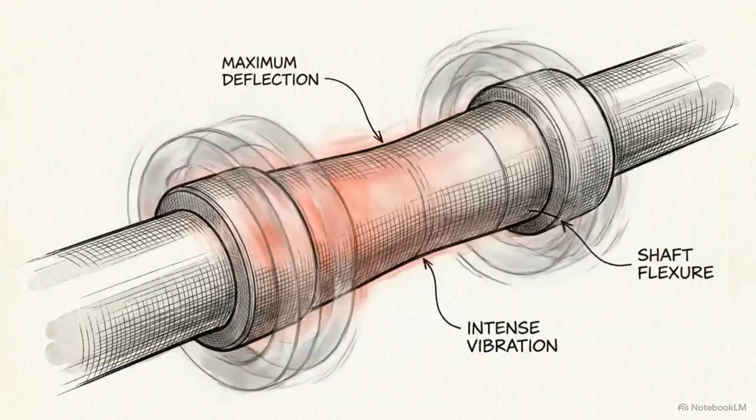Mechanical vibration is the continuous exchange of energy within a physical system. It is the physical process of kinetic energy converting into potential energy, and then back again, over and over.

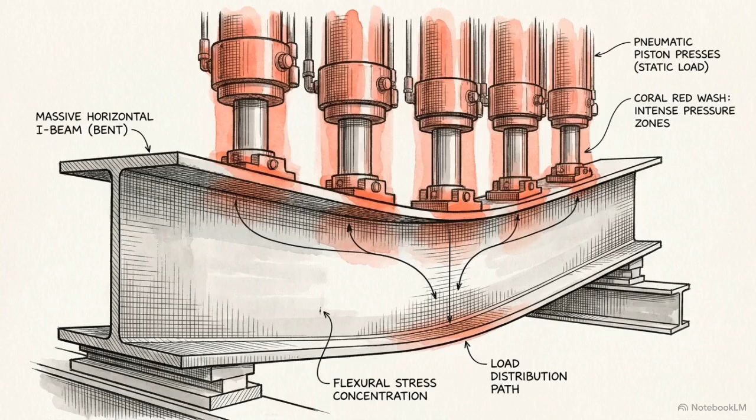When analyzing structural integrity, calculating static loads, how much dead weight a beam or a column can hold, is a necessary first step. But static calculations assume a perfectly still environment, and they fail to account for cyclical, repeating forces. Cyclical dynamic loads inflict microscopic damage. Repeated rhythmic flexing exploits tiny imperfections in a material, causing microscopic fissures to rapidly expand and spiderweb until the part

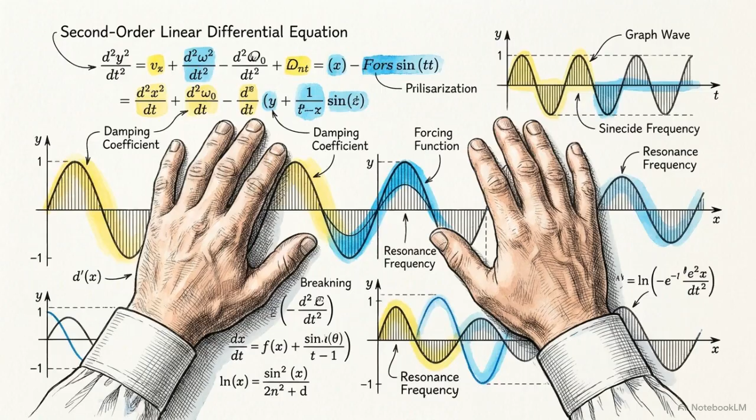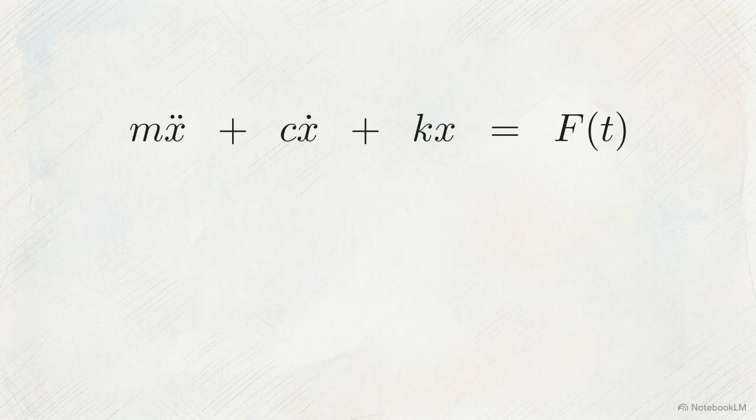eventually breaks. To predict how and when these failures will happen, engineers rely on a specific mathematical framework, a second-order linear differential equation. This is the universal equation of motion. It organizes any physical system into three interacting properties: mass, which dictates inertia; stiffness, which defines elasticity; and damping, which is the system's ability to dissipate energy. Preventing a structure from vibrating itself to pieces requires understanding exactly how these three variables balance against each other.

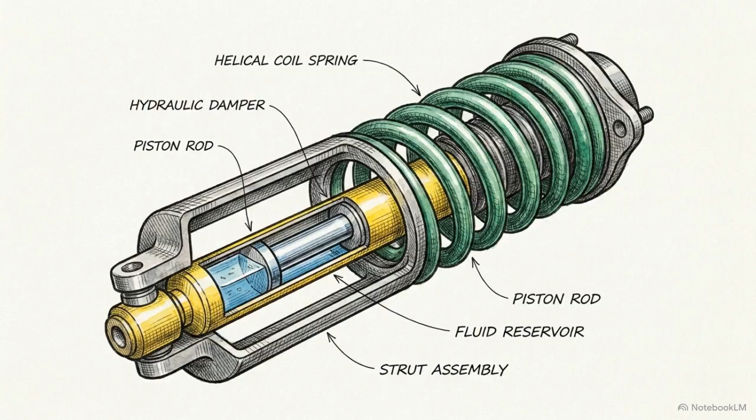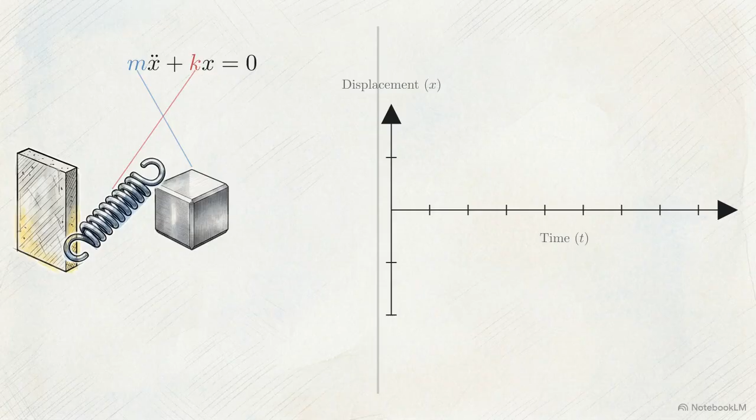To understand the math, we establish a theoretical baseline. We remove damping and external forces entirely, leaving a system governed by only two properties: mass and stiffness. Stripped down, the differential equation reads simply as mass times acceleration plus stiffness times displacement equals 0. Once set in motion, two opposing forces fight for control. The mass's inertia drives the block forward, while the spring's stiffness creates a restoring force that pulls it back.

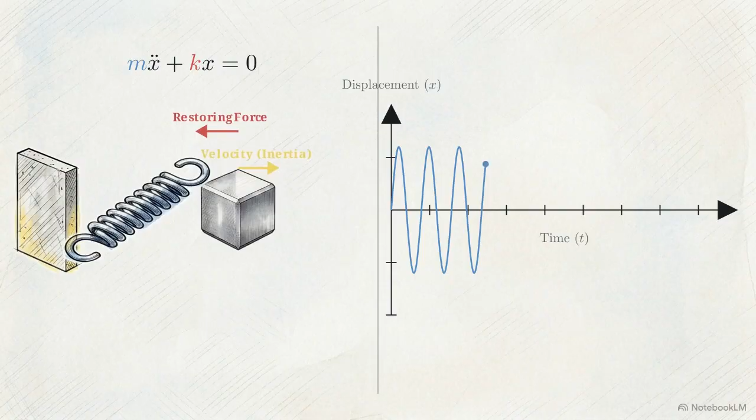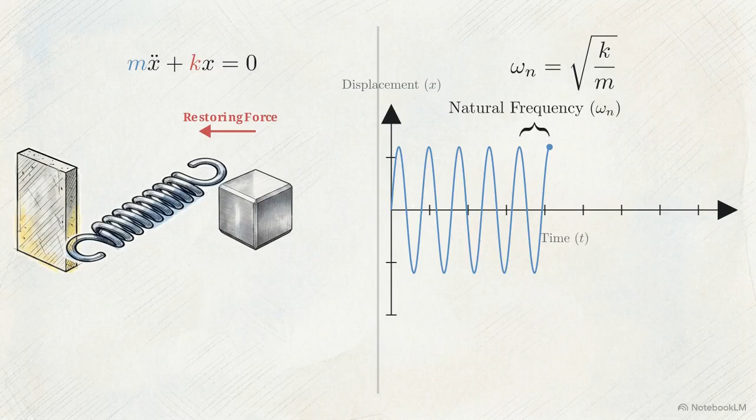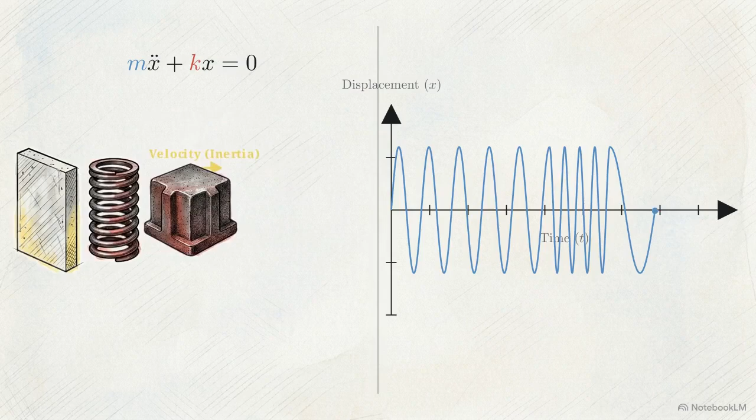If we plot this continuous physical displacement over time on the right, the result is a perfect, unending sinusoidal wave. The exact timing of this cycle is called the natural frequency. Mathematically, it equals the square root of the stiffness divided by the mass. Because of this ratio, increasing the stiffness of the spring will shorten the wavelength and speed up the cycle. Conversely, adding mass increases inertia, which lengthens the wavelength and slows the cycle down.

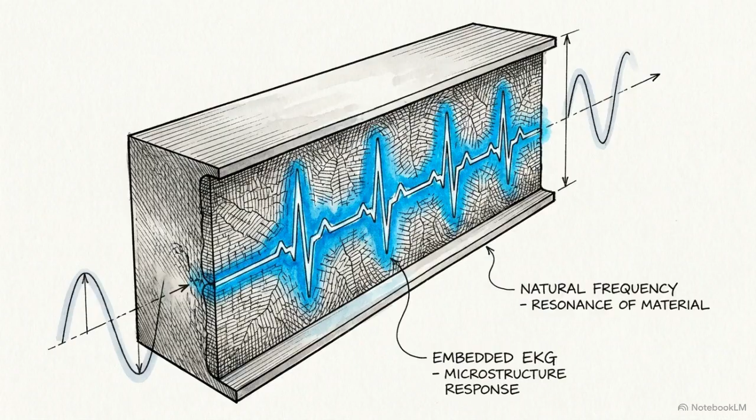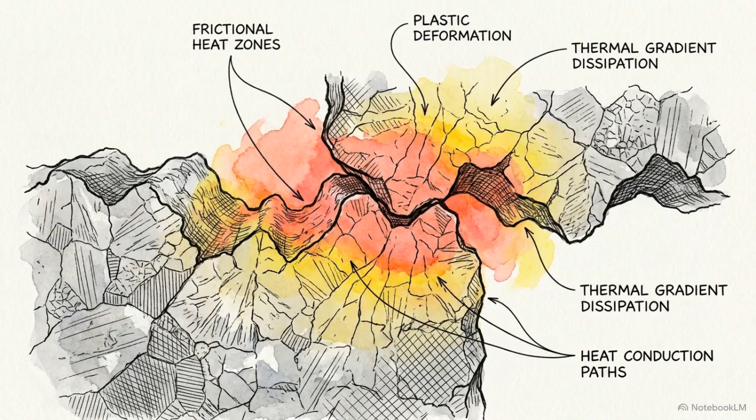Every physical object, a guitar string, a steel beam, or a suspension bridge, possesses an inherent natural frequency. It is the structural heartbeat of the material itself. In reality, perfect endless oscillation is impossible. No physical system is completely frictionless, meaning energy will always dissipate into the environment.

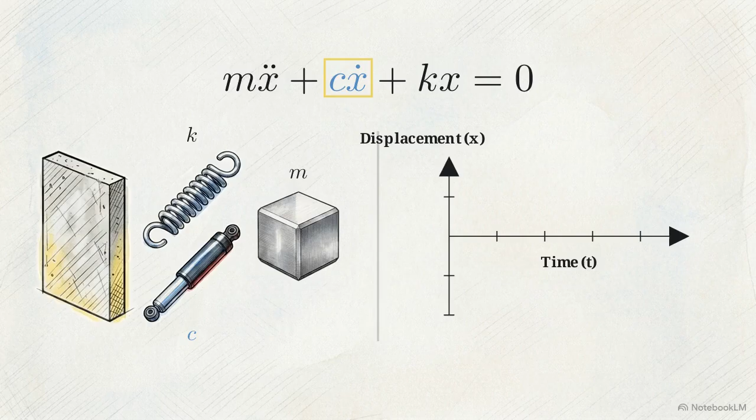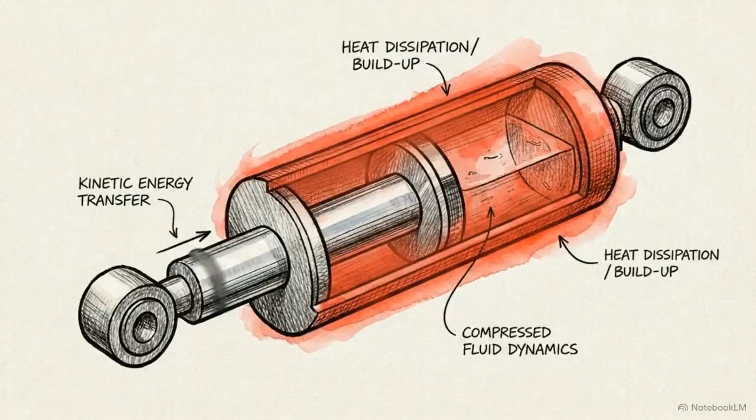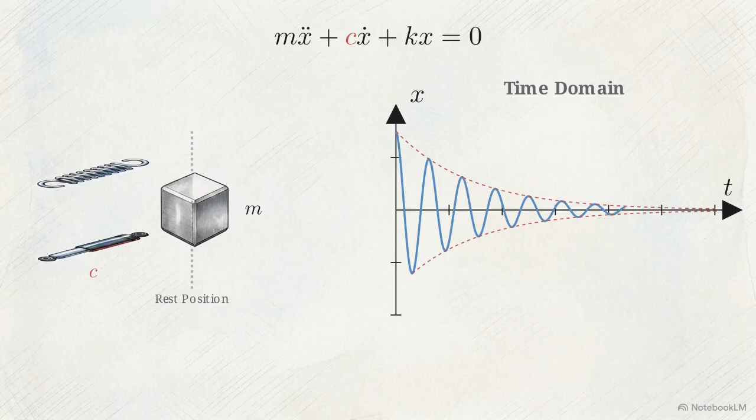To model this, we reintegrate the damping variable back into the differential equation, representing it physically as a mechanical dashpot attached to the mass. The damper's function is to continuously remove kinetic energy from the moving system, usually by converting that motion into heat through friction or fluid resistance. As the damper bleeds energy from the system, the time domain graph changes. The perfect sine wave is compressed by an exponentially decaying envelope, shrinking the amplitude until the system comes to rest.

Engineers quantify this rate of energy loss using a metric known as the damping ratio. The damping ratio dictates how the system settles. An underdamped system oscillates slowly to 0. A critically damped system returns to rest as fast as mathematically possible without oscillating. An overdamped system takes a sluggish, prolonged path back to its resting state.

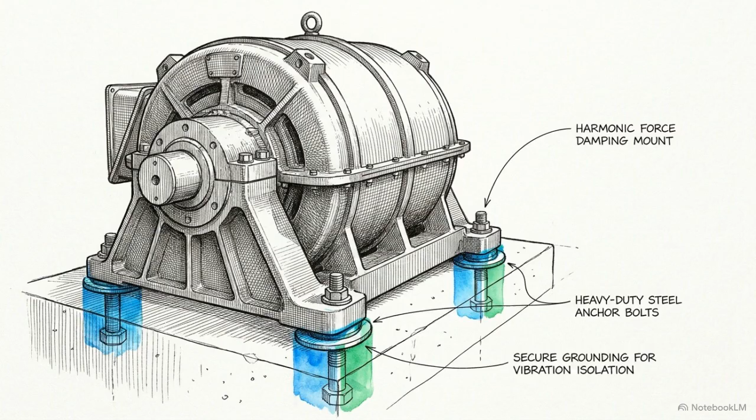With mass, stiffness, and damping established, the system is prepared for the final variable, a continuous external harmonic force. We update the equation to its complete state by setting it equal to this external force, represented mathematically by a sine function fluctuating over time. Measuring the impact of forced vibration requires a different analytical tool. The time domain graph is discarded, and we shift our view to the frequency domain.

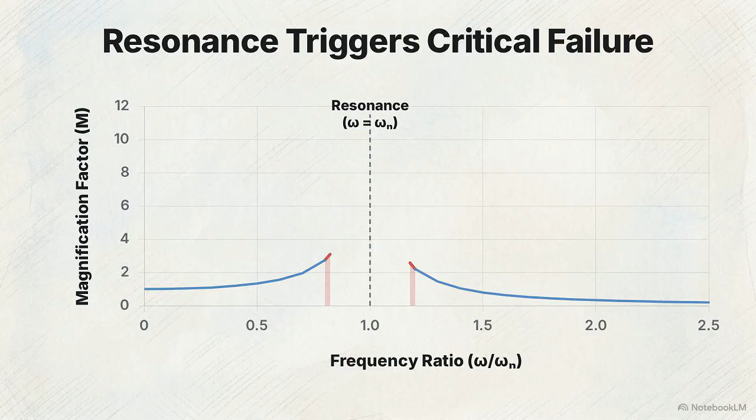The object simply moves along with the push, and the magnification remains low. If the external force pulses much faster than the natural frequency, pushing the ratio well past 1, the mass's inertia actually isolates it from the rapid shaking, and the physical displacement drops near 0. But there is a critical failure zone in the middle.

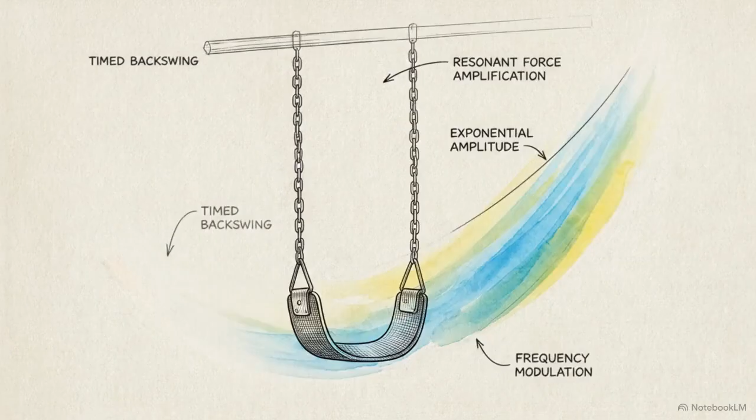When the frequency of the external force exactly matches the internal natural frequency of the structure, the ratio equals precisely 1.0. The curve spikes violently. This precise mathematical alignment is called resonance. At resonance, the external force pushes the structure at the exact moment it already wants to move. The physical amplitude grows exponentially.

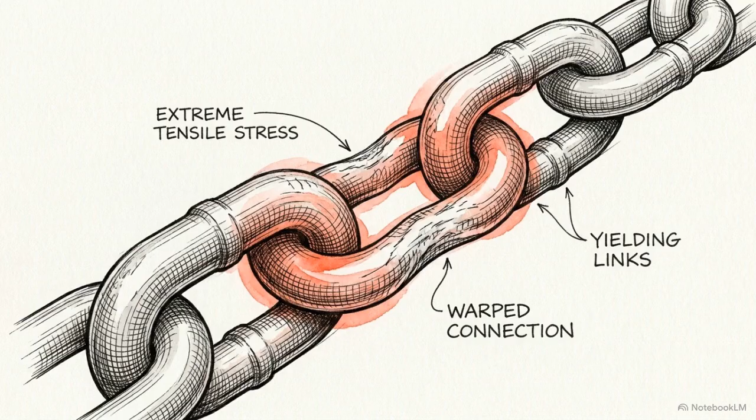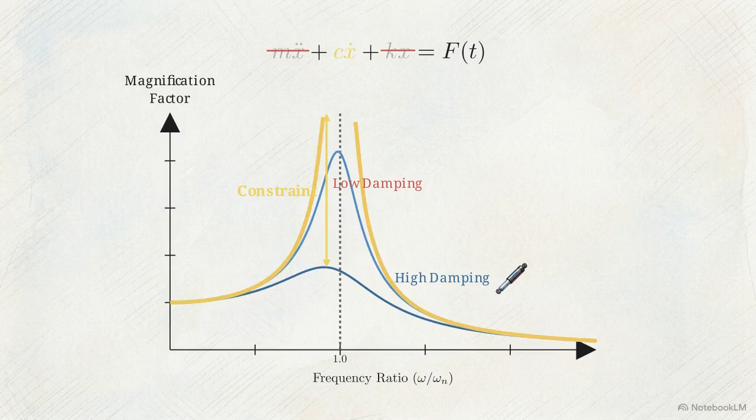With every single cycle, the vibration becomes completely unconstrained by the object's mass or stiffness. In a resonant state, the mass and stiffness equations cancel each other out entirely. The damping variable becomes the only physical constraint preventing the structure from vibrating to infinity. If a structure lacks sufficient damping materials to bleed off that energy, the physical displacement will rapidly exceed the material's structural limits. The entire discipline of vibration analysis exists to calculate exactly where this resonant peak will occur along the frequency spectrum, so that the system can be engineered to avoid it.

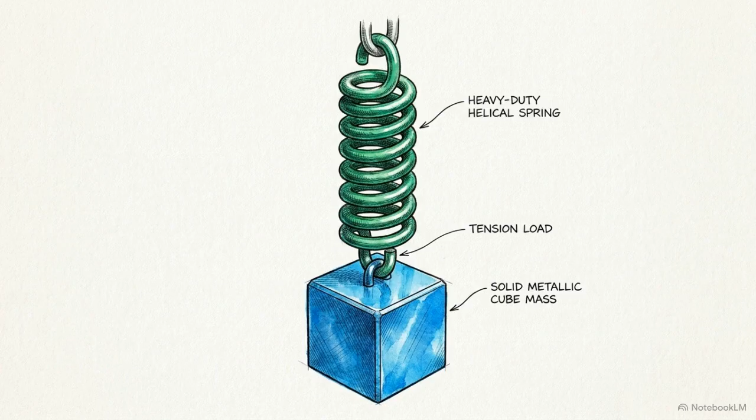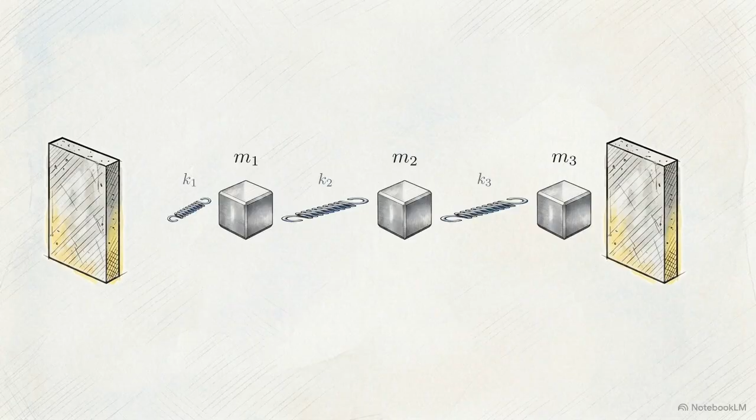Up to this point, we have modeled a single mass on a single spring. But real engineering structures are continuous physical bodies capable of infinite directions of movement. To handle this complexity, engineers divide these continuous bodies into a series of multiple masses connected by multiple springs. This is known as a multi-degree of freedom system.

Because there are now multiple overlapping variables interacting at once, the single differential equation must be upgraded into a matrix format. The single mass variable expands into a comprehensive mass matrix, and the single stiffness variable expands into a corresponding stiffness matrix. This matrix format accounts for mathematical coupling. In a connected system, any movement in the first mass directly alters the tension on the springs attached to the second and third masses, creating chaotic feedback loops.

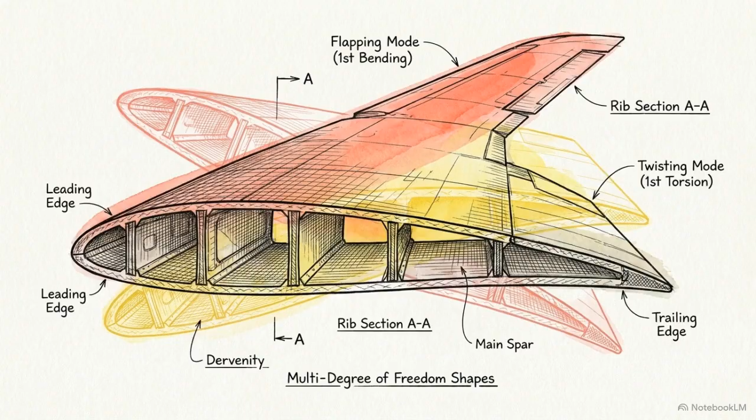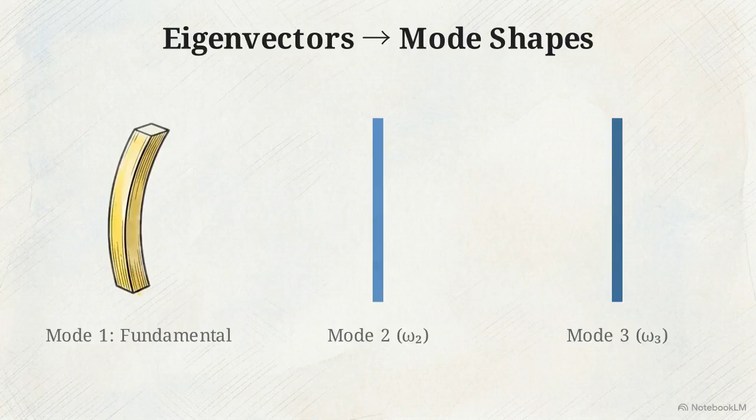The mathematical solution for untangling these coupled equations requires calculating two properties: eigenvalues and eigenvectors. Eigenvalues represent the multiple natural frequencies of the system. Unlike our simple single-mass model, a multi-degree of freedom system possesses several natural frequencies that exist simultaneously. Eigenvectors determine the mode shapes. These are the independent, predictable geometric patterns the structure will physically bend into when driven at each specific eigenvalue. By utilizing matrix algebra, engineers can mathematically decouple the chaotic physical shaking of a real-world object into a clean set of independent, predictable vibrational modes.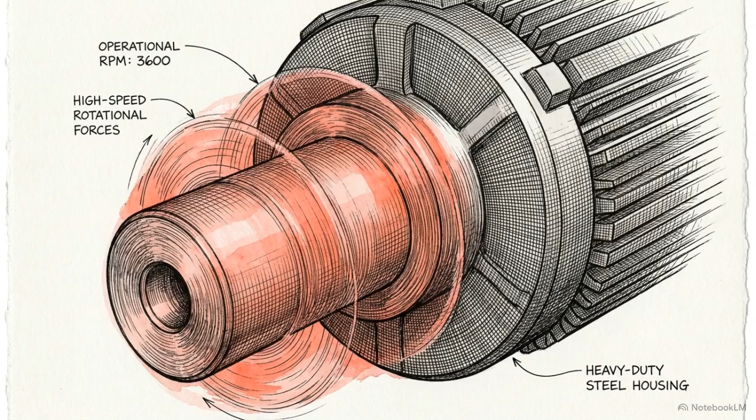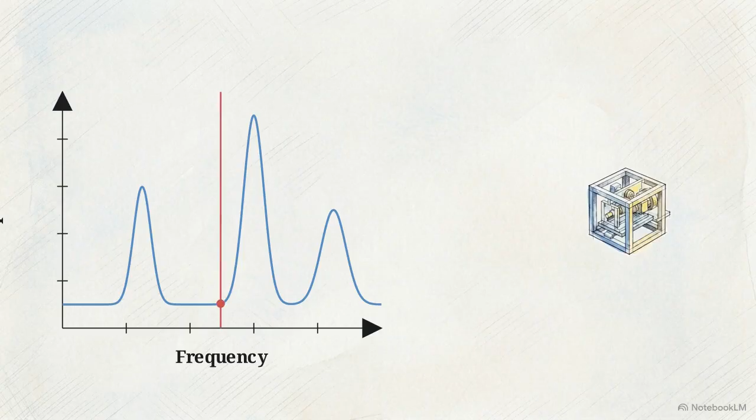We can apply this matrix theory to a practical engineering problem, like mounting a heavy, rotating industrial machine onto a structural frame. The first step in structural analysis is defining the external forcing frequencies. In this case, those forces are generated by the machine's operational RPM. The second step is evaluating the frame itself. Engineers build the specific mass and stiffness matrices for the design to calculate its inherent natural frequencies. Comparing the machine's operational frequencies against the frame's natural frequencies reveals exactly where dangerous resonance will occur. If found, the eigenvector maps the exact mode shape, showing how the structure will twist under that load.

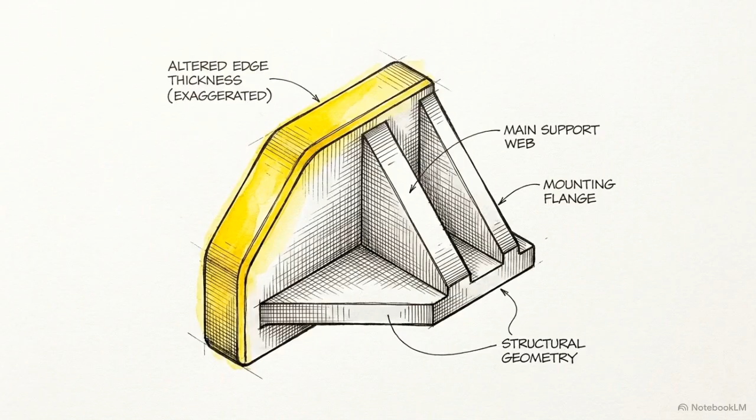The primary intervention is rarely just packing the frame with damping materials to absorb excess energy. Instead, the optimal solution is to adjust the physical design to intentionally alter the mass matrix or the stiffness matrix. Stiffening a bracket increases K, while adding mass increases M. These adjustments shift the frequencies, safely out of operational range.

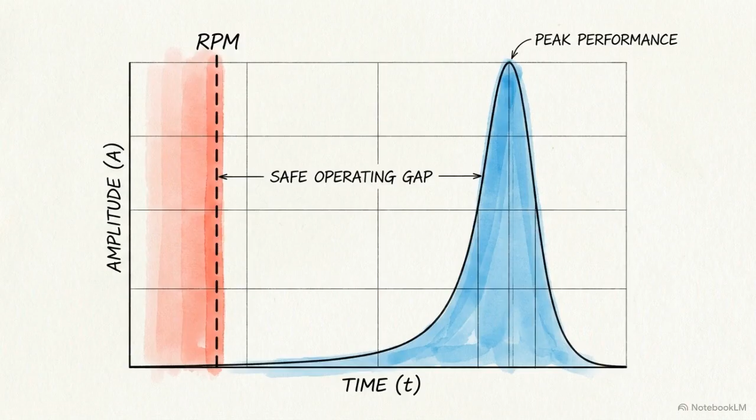This is the core methodology of researchers like Thomson and Dahleh. True structural integrity is achieved by mathematically predicting resonance long before manufacturing begins. By mastering these differential equations, engineers maintain precise control over kinetic energy. This ensures modern structures can safely absorb dynamic loads without failing.